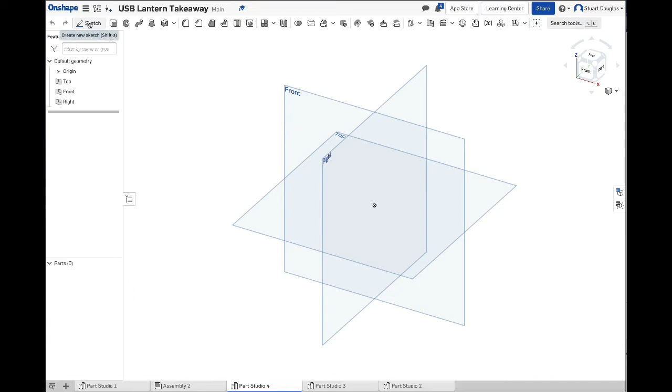In the part studio, we wish to draw on this top datum plane. To do this, we add a new sketch and select the datum plane. We'll look at it in a 2D view and sketch a corner rectangle from the top left here to the bottom right here. Click once, click again, and release.

We now need to dimension this rectangle to become a square. Click on one side, change it to be 56 millimeters. Click on another side, change that also to be 56.

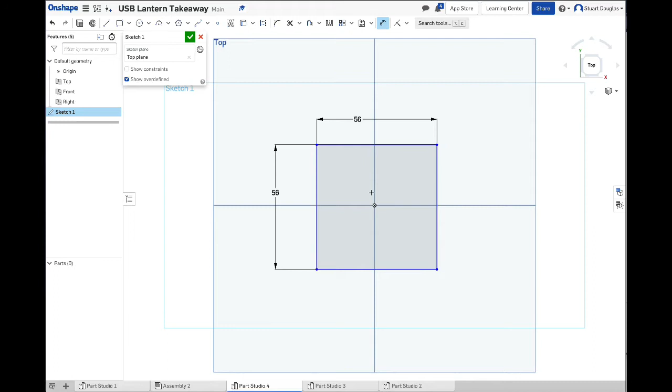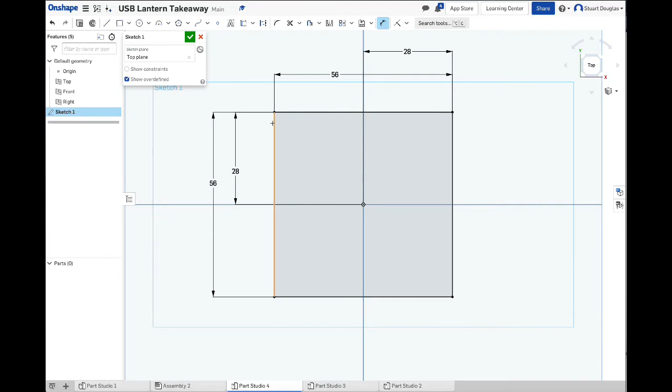Ideally, we want it centered on our datum plane, to make life a little easier. You may notice if you look carefully, it's slightly bigger on one side than the other. To fix this, select the line, then select the center point, which places a measurement between the two, and set half of this measurement, which is 28. We'll repeat the same for the middle and the top, changing that to 28 as well, meaning our square is now exactly in the middle.

We'll accept our sketch, spin round in 3D, and extrude our sketch 5 millimeters. Select it, choose 5, and choose OK. We're now going to sketch 4 rectangles on the top surface here.

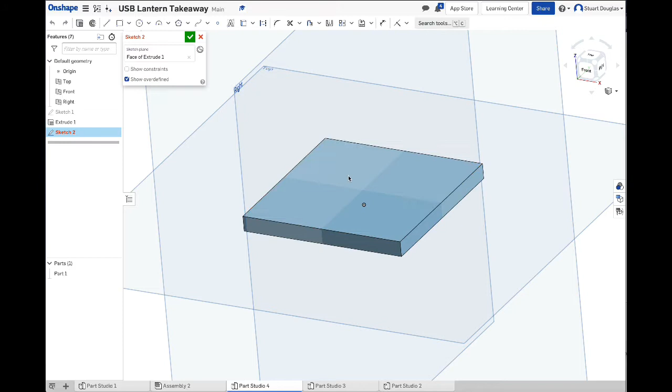To do this, choose the sketch tool and select the top face, again in top view. Let's zoom in. Select the corner rectangle tool. I'd like you now to sketch 4 rectangles going across with a slight gap from the edge. We now need to dimension these rectangles very accurately.

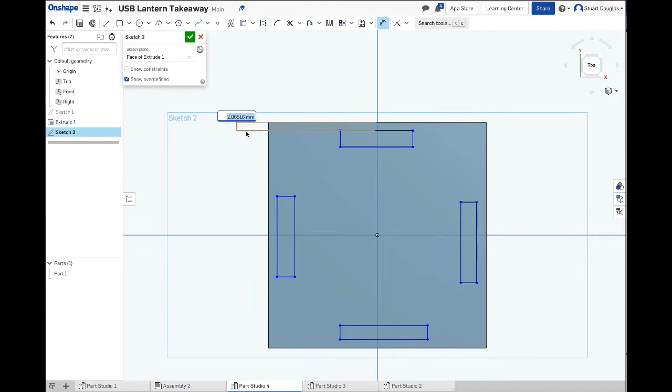All of the rectangles are 2.2 millimeters from the edge, so we'll start with that measurement. Select one, select the other, drag away, and change it to be 2.2. Notice when I changed the first one, the others also moved. So again, we'll select all of them and change them.

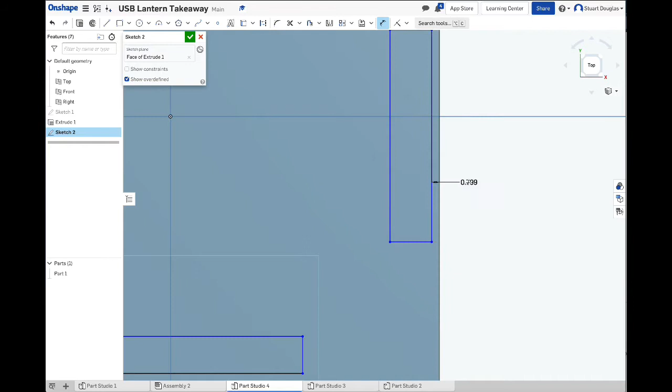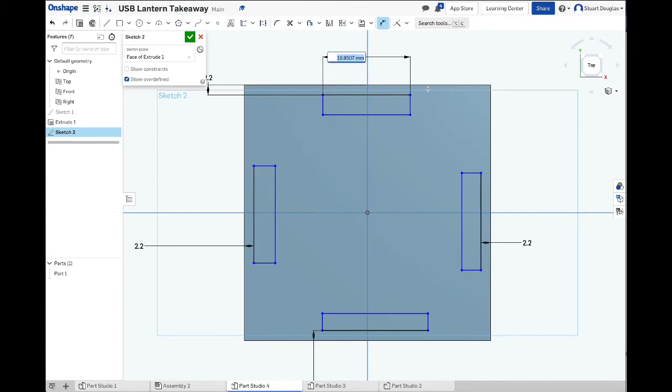All of the rectangles are now the correct distance from the edges. What we now need to do is measure the width of the rectangle, the thickness of the rectangle, and the distance from the edges. We'll start with the width. The width is 20 millimeters. We'll repeat that for each of the rectangles in turn.

Next, we'll do the thickness of the rectangles. To do this, we select both lines and choose 3 millimeters.

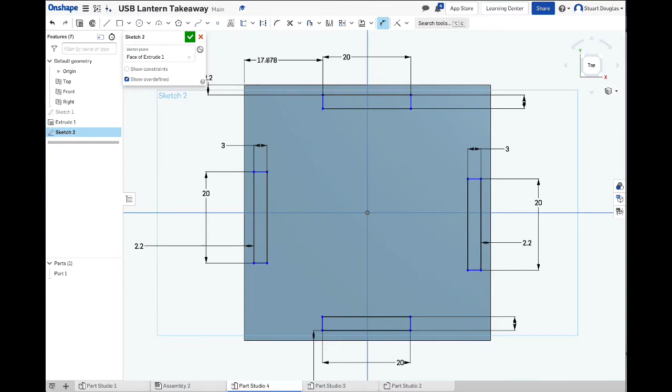Lastly, we're going to measure the distance from the edge of one of these rectangles to the edge of the work. Select both edges and change it to be 18. The other side will also be 18, because the total width is 56, and we have 18 plus 20, leaving 18 on this side. We'll repeat for each of the other edges of the rectangles.

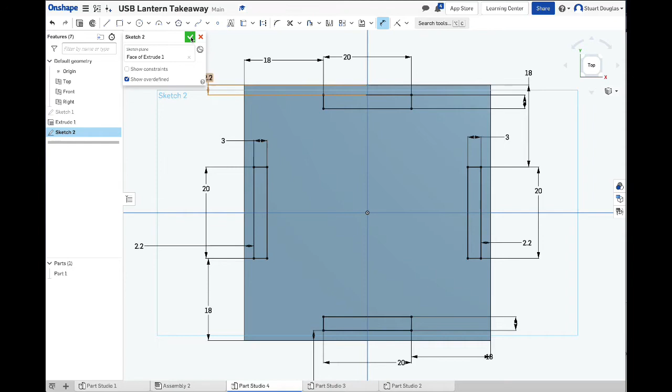Now that we've accurately modelled our rectangles in place, we'll accept our sketch, spin round into 3D, and extrude those rectangles. Select all four, like so, and extrude these rectangles to a height. We want the height to be 14 millimeters.

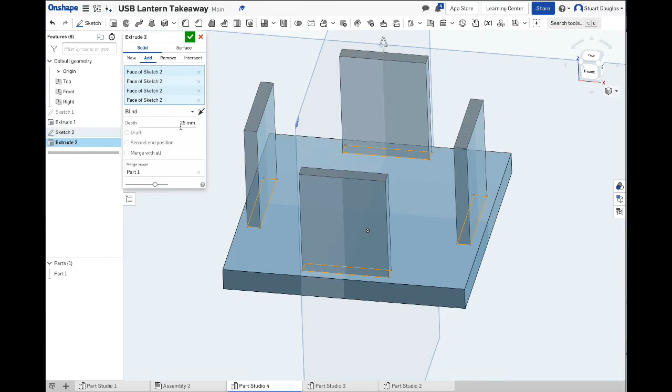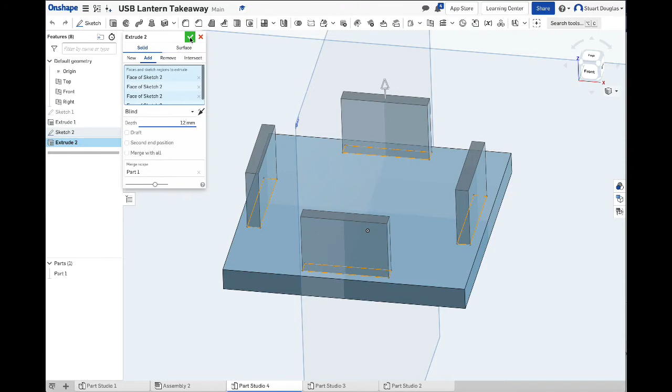Click accept — now let's look at how you can edit a feature. We actually extruded these blocks 14 millimeters, but we really want them to be 12 millimeters. To change a feature after you've modelled it, hover over it on your model tree, right mouse click, and choose edit. In the dialog box, we can easily change the measurement. Hit accept, and you can see that all move.

This is how you can go back and change any extrusion or any sketch at any time — you right click and choose edit. Everything is correct so far, so we'll now move on to adding 4 holes onto this top surface so that we can add feet that are 3D printed onto this base part.

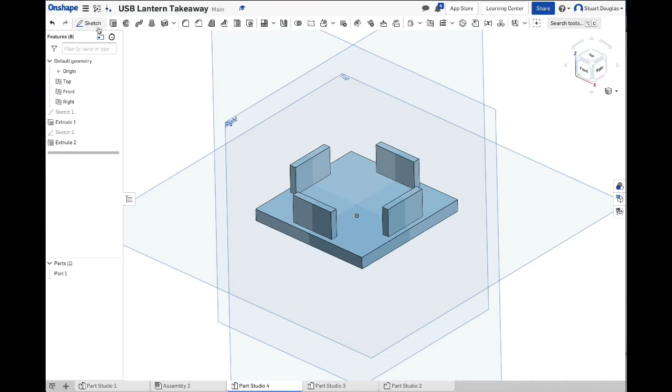To do this, we select the sketch tool, select our top face, and look at it from above. Let's zoom in to make life easier. We're going to use the center point circle tool and draw 4 circles, one in each corner of the square.

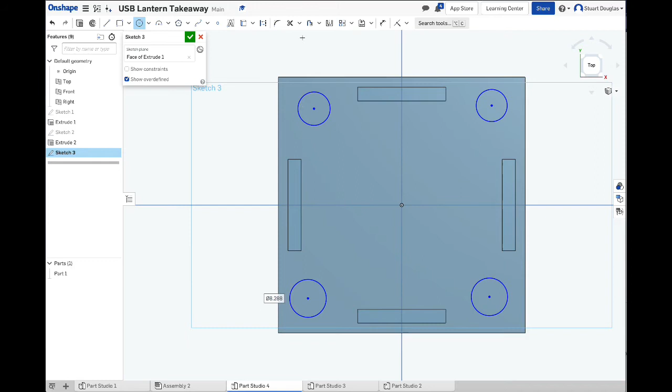What we then need to do is choose our dimension tool and measure our circle from the center point here to the side, and from the top line here to the center point. Click on one, click on the center, click on the line you wish to measure from. Here is my measurement — let's type in 10.

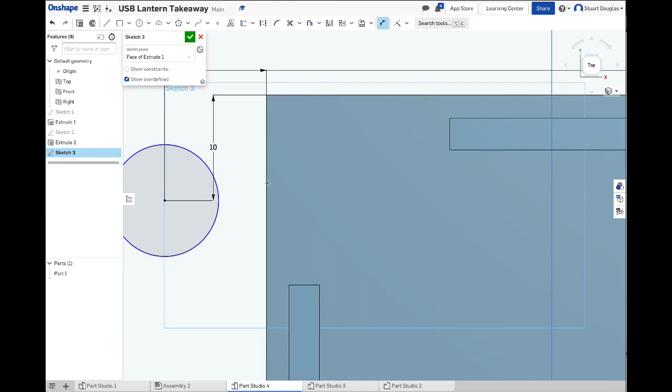This moves our circle to be 10 — it's actually moved our circle to the side. We don't need to worry about that, because what we need to do is measure our center and our line. In this case, again, we want 10. However, if I type in 10, you'll notice it moves 10 from the outside. So in this instance, we need to change our measurement to be -10, which moves our circle to the correct place.

We're now going to do the same for our other circles: pick the center point, pick a line, measure, and enter -10.

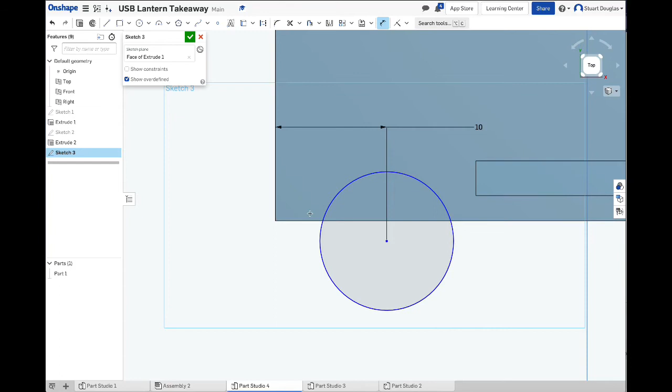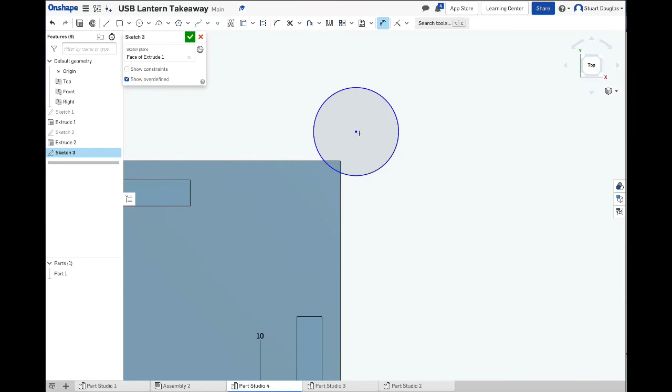Pick the center point, pick the bottom edge, minus 10. That puts our circle in the correct place. If your circles are moved inside your work, that is fine, it won't be minus 10, it will be plus 10, or just 10. So you can see very quickly, I'm just going to move my circles into the correct place on my work. I now have my 4 circles that are 10 millimeters from the edge and 10 millimeters from the edge.

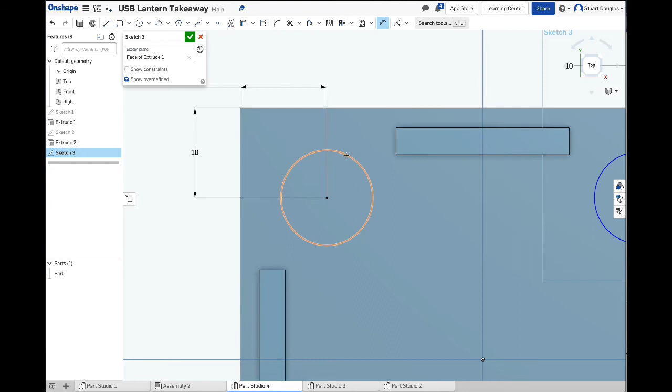What I now need to do is make sure that my circles are all the correct size. So I'm going to zoom in and pick the outer edge of my circle while I've got the dimension tool selected, and drag away. This currently means that my circle is 10.13507 millimeters in diameter. I'm going to change that to be 8, and I'm going to repeat that for my other circles.

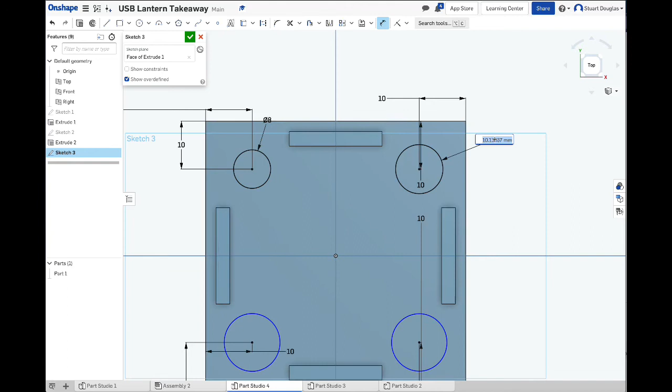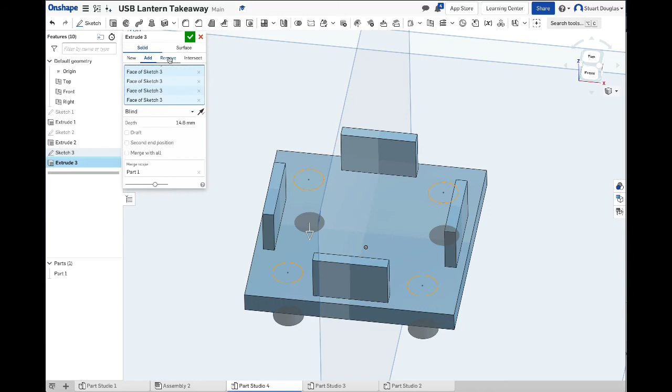Like so. Accept my sketch, spin round into 3D, extrude my circles, drag down, and then select the other circles as well. Ensure that we're not on add, that what we wish to do is remove, and we end up with 4 holes. Accept the sketch.

To do this, click on the sketch tool. We want to add a sketch to our top face. Let's look at our top face from above. Let's zoom in to make life easier. Let's choose a center point circle. Click in the center of your work. This is why we made our square exactly in the middle. This means that our circle is now in the middle.

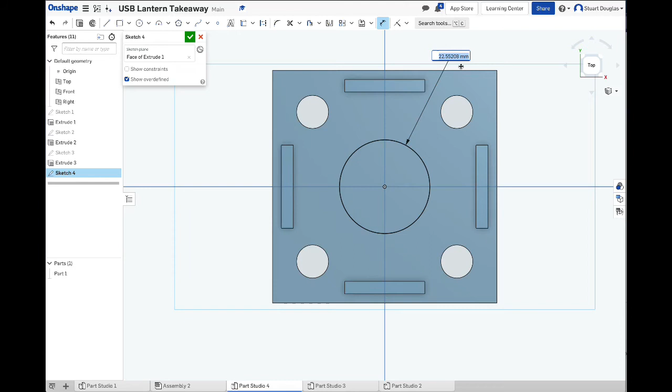We're going to choose the dimension tool and dimension this hole to be 15 millimeters. We're going to accept, spin round in 3D, extrude our circle downwards, removing the material, and accept. Just to finish our part is to soften the edges. Softening the edges means adding a small round or fillet.

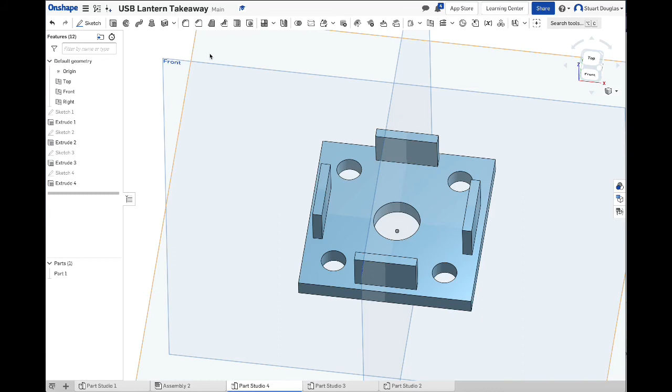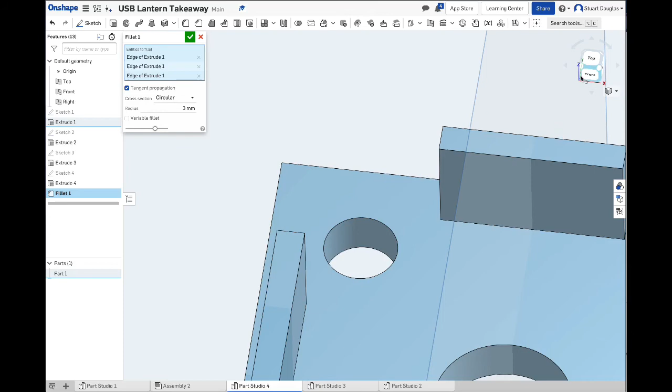We do this by going to the fillet tool on the top toolbar, zooming in, selecting an edge. At the moment it's adding a 5mm round. We'll add a radius of 3 because we only want a small one, and then we'll zoom out and pick the other edges. If you can zoom in without spinning your work, it still works. You probably cannot get this edge, so let's spin our cube round here and let's pick our edge. With the same 3mm round, we'll also add a round to our top edges.

Let's select those to soften them. And lastly, to give these extrusions a little bit more added strength, we're also going to round our bottom edges, to fillet them to this surface. This additional piece of material here gives great strength to these parts, meaning they don't snap off.

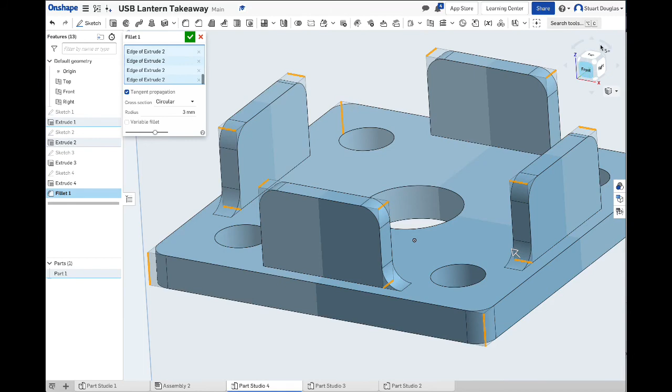So I'm going to go around my edges, the ones that I can see. This requires some spinning of your work to be able to select all of the edges. As you can see, and when I've done, I'll accept, and you can see now I have all of my edges.

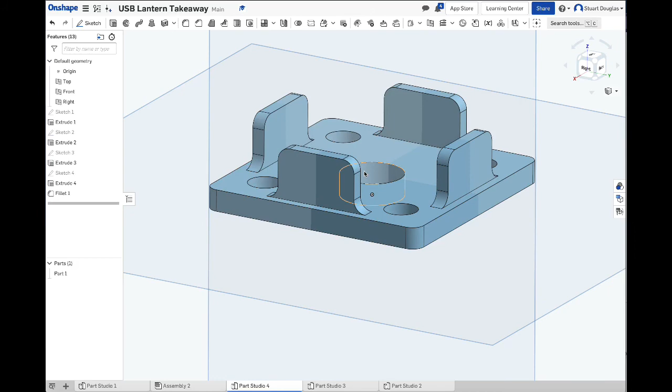Stage now is to see what this part will look like within our assembly. We can do this by going to our assembly. Here it is with all of our parts in. Let's hide the bottom legs by selecting hide bottom leg part. Hover over and you click on the eye and it hides the part.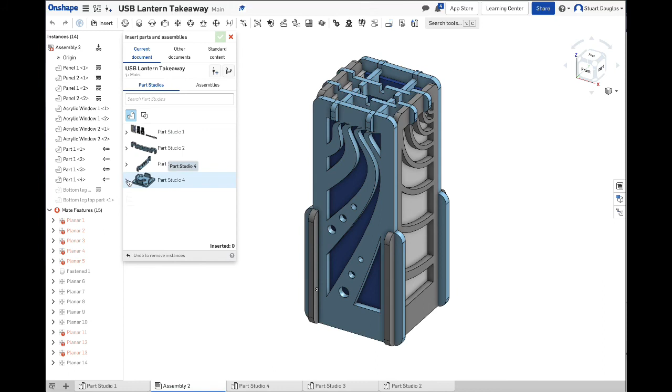Let's click on insert. Let's go to Part Studio. Here is my new Part Studio that I just created, and it brings in my part. I'm going to use my cube just to rotate my work, because I'm just going to do this visually by eye. As you can see, here is my part in the right place.

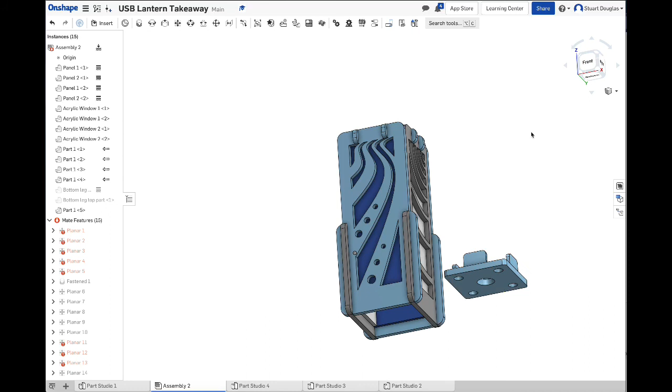So I'm going to accept. I'm now going to select my part, and I'm just going to maneuver it ever so slightly, as you can see, just to get an idea that everything is in the correct place, as you can see there, like so. Okay.

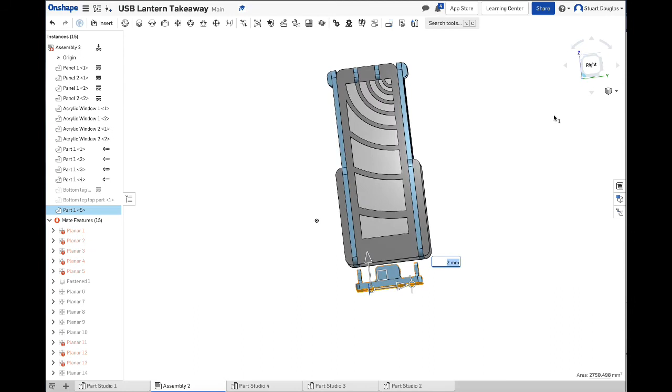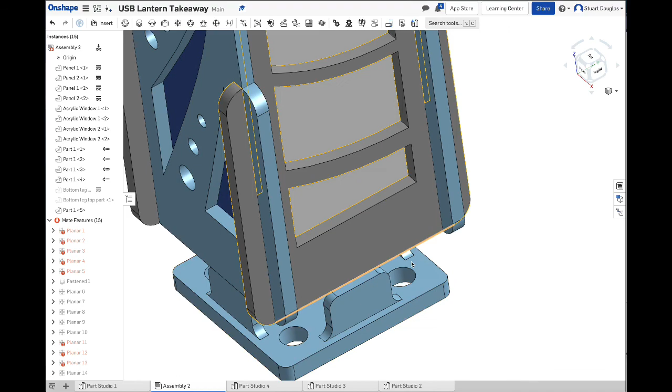Let's click off it. The last thing that we will do on this is to choose some planar mates, as we have done so far. We're going to mate this surface with this surface. And if we think about this, how we could do this, if we select this surface and select the center here, we select this surface and select the center of this one, the two parts should line up accurately.

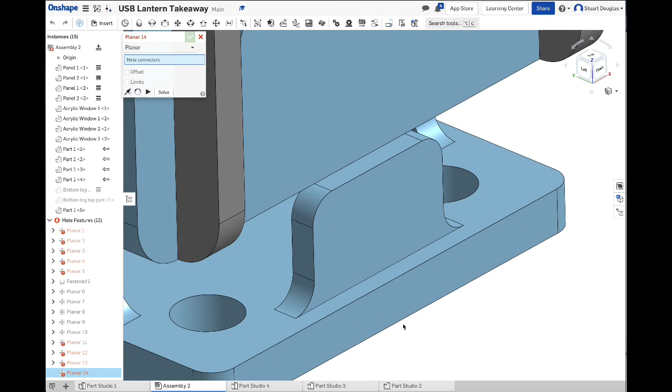Now that we've got our part in place, we need to do our planar mate. We'll go to the planar mate tool. Now, we need to zoom right in. The part that we want, the exact point, is this point here. So we need to make sure that this face is selected, not this one, and move our mouse across until we can choose that point.

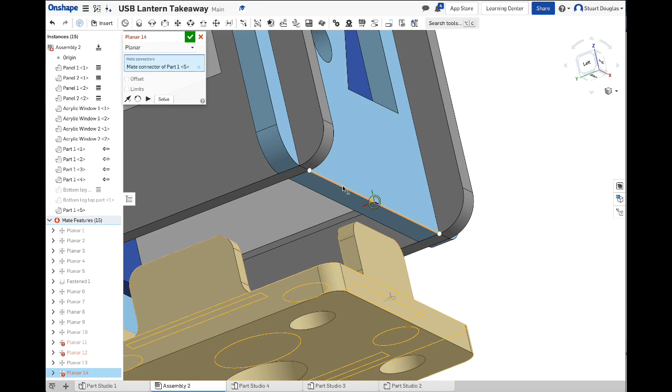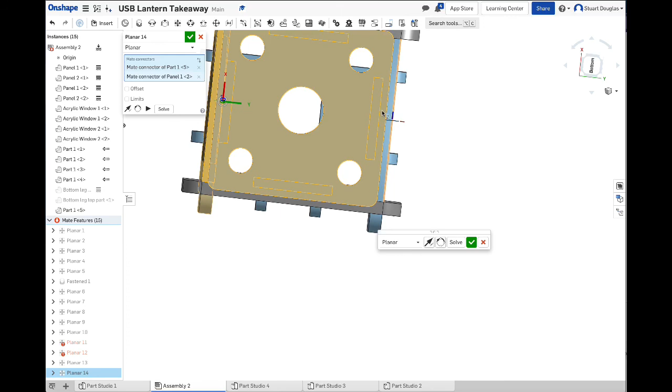Now we're going to zoom out a little and spin our cube around. What we want to do now is join that point to this point here of this bottom face. So let's zoom in, let's get our face and choose the matching point. Now when I zoom out, what you should see is that our part is perfectly aligned on all four sides with a slight distance to the outside of your work. Let's green tick to accept. Close the planar mate.